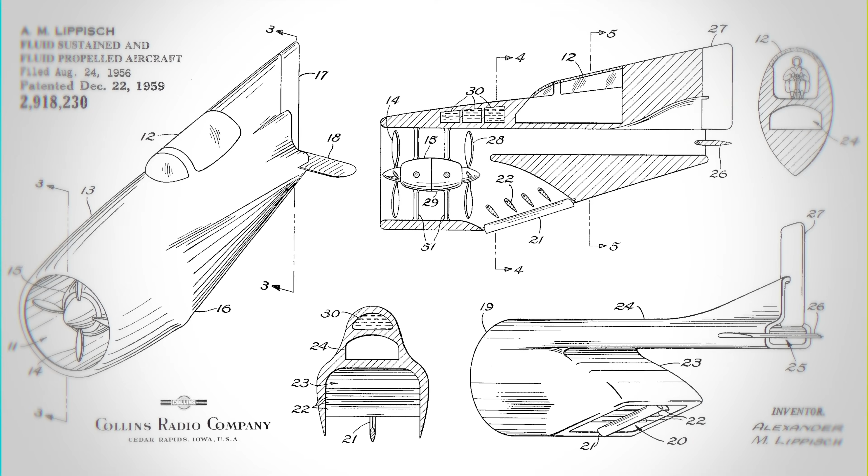These are the upscaled and colorized lessons of Alexander Lippisch. Lippisch was a pioneering German aeronautical engineer renowned for his significant contributions to aerodynamics, particularly his work on tailless aircraft and delta wing designs. His career spanned crucial decades of aviation development, marked by a persistent exploration of unconventional flight concepts.

Today, we want to talk about stability and control of an aircraft. You know, it is often said that if you have an engine with enough power, even you could fly a barn door. Now, I must doubt that. Well, I couldn't make the experiment with a barn door right in here because I fear the barn door is too big for this place.

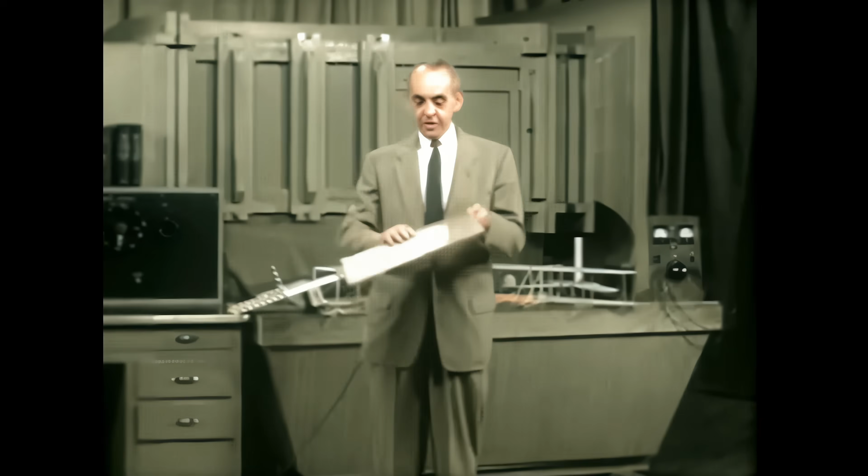But I could probably take this cardboard as a model of a barn door. And we can try to fly this barn door model. And you will see how it flies. Well, I think the barn door does not fly. Even if I give it a push, it makes only erratic motions and falls down, but it does not fly.

See, this is an important point. Something which moves through the air, we call it fly. And some other thing, we say it falls or it is thrown. What's the actual difference? When something flies, we expect to have a steady motion with almost uniform velocity, where this thing which flies keeps the same attitude all the time. Something which is thrown might change its attitude, it might change its course and do erratic motions.

Well, I can explain it in a very simple experiment to you. See, I have taken from my desk calendar two pieces of paper. The one piece of paper is just this one. You see, when we let it go, it makes these erratic motions in falling down, as you see with any piece of paper. Now, if you fold some part of this up so that you get a special position of the center of gravity and shape it a little bit different, then you can make it fly. You see here?

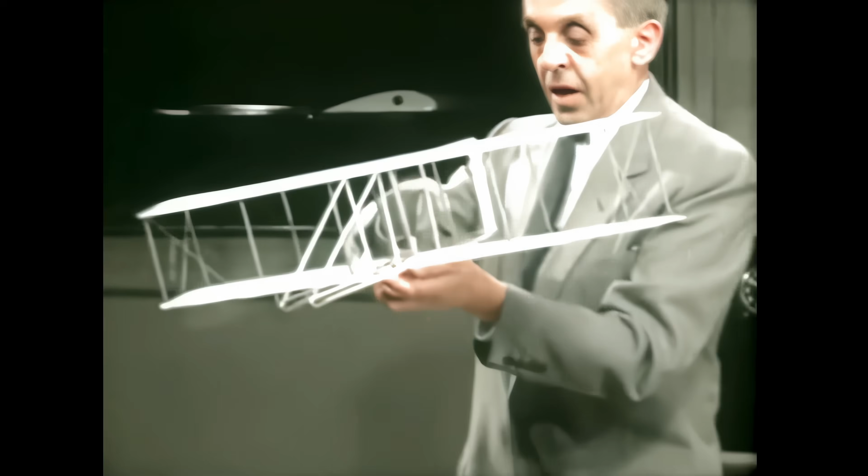Now I have here a very nice model of their 1902 glider, an exact model of how the glider looked. We have even built in the controls as they used them. The pilot lays down on this lower wing and has in his hand the elevator control, which is this one. You see it move?

So he pulls back and the thing goes up. Now he has a cradle where he lays in, and when he shifts this left or right, the whole wing warps. I hope you can see it. This warping is actually not very much of what you need there.

You see, when I warp it this way, this angle is smaller while this angle is larger. But they met one difficulty this way. The moment you warp it so that this angle is smaller and this one higher, the plane would roll over this way. Then, due to the higher lift which you have here, you have more drag, and this drag would actually try to turn the plane against the rolling.

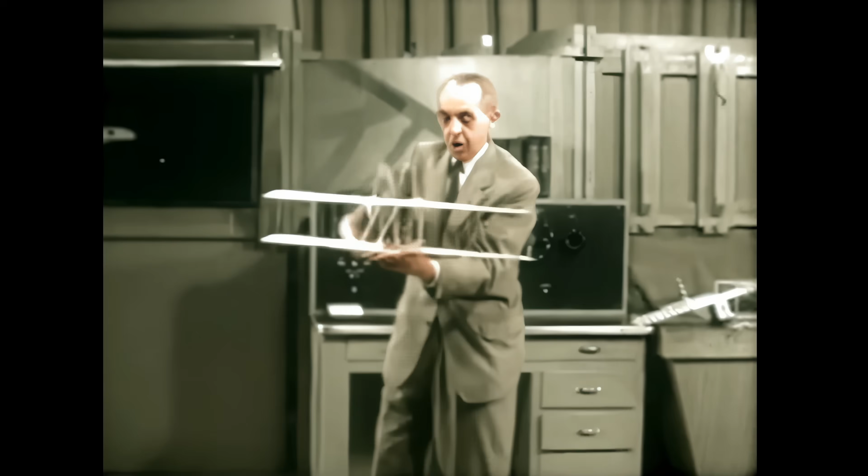Therefore, in addition to the wing warping, they used a rudder directly connected with the wing warping, so that when you push this wing down and have more lift but also more drag, the rudder would counterbalance this drag by turning the aircraft in this way. This very intelligent method of controlling an aircraft was actually the solution to the invention of the first flying machine.

Now, most people would think that such a control in front for pitch, meaning for longitudinal motions of the aircraft, would not be stable, that you'd have to control it all the time. Actually, that is not so. You can make an aircraft flying stable in pitch with an elevator, as we call it, in front or at the rear, and in both cases you can obtain stability of flight.

As I can show you here, I have a little tiny, flimsy model where I have the additional horizontal surface, the so-called elevator, in front. You will see that this flies very nice and stable.

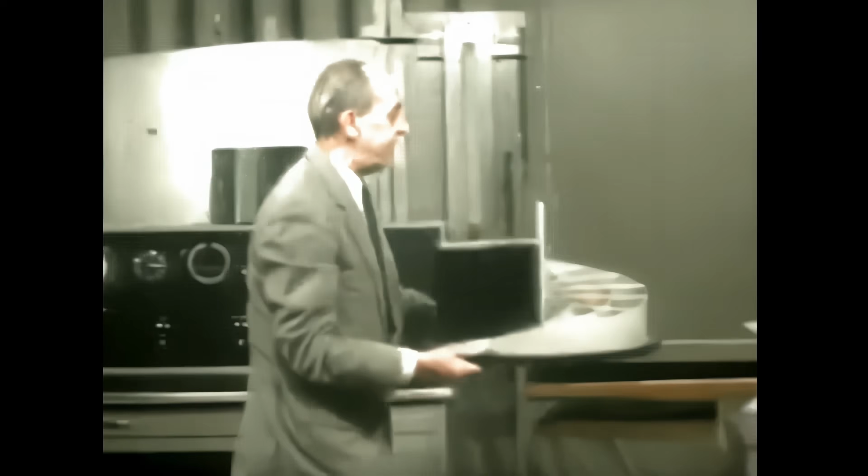Here you see a spiral surface like this, and you can imagine that each of these little sticks represents the position of a propeller blade while it goes once around. And we have to put the propeller on such a surface which is here steep and there gradually more flat.

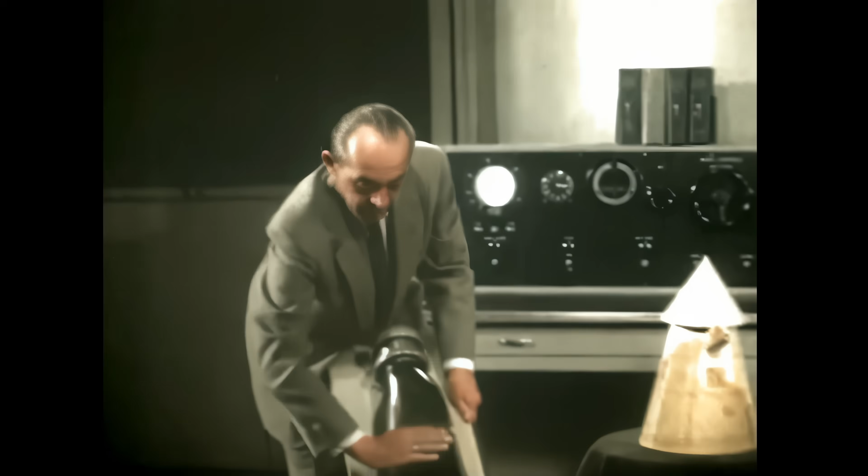We can see that also if we take a propeller model like this here. Look at it. You see that this is warped, and we have inside the steeper angles and outside the more flat angles. But if we take a piece out, we see that each section looks exactly like a wing, as we had our wings in the smoke tunnel.

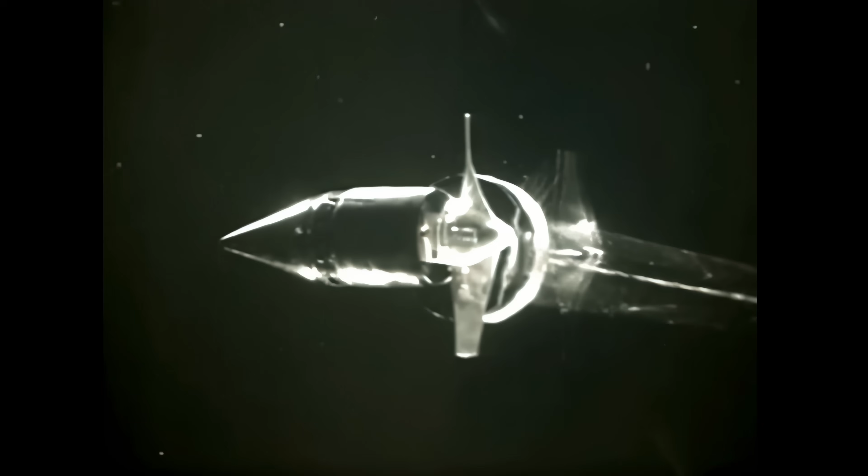Now, to observe the action of such a propeller, we have here a model in our smoke tunnel. This model is just a tiny propeller driven by a small electric motor. We have only 3 inches width in this smoke tunnel, so this propeller is quite small. You see it here mounted in the tunnel.

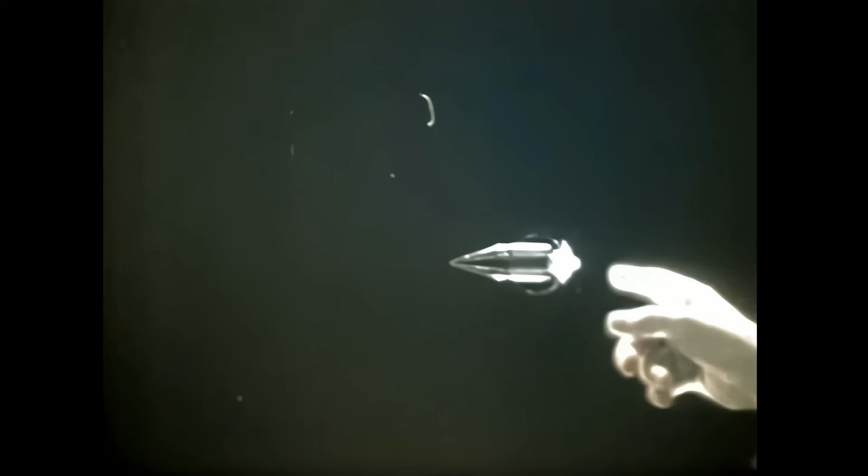And when we now turn the electric current on, you see it runs and draws the air through the tunnel. If we start now the tunnel itself and produce some smoke, then we see at once the flow picture around a propeller. Isn't it interesting? You see, in front, the air is sucked into the prop and is accelerated before it hits the propeller disc. And then behind it, it again is pushed out. So we have a pressure differential across the propeller which pushes the air backwards.

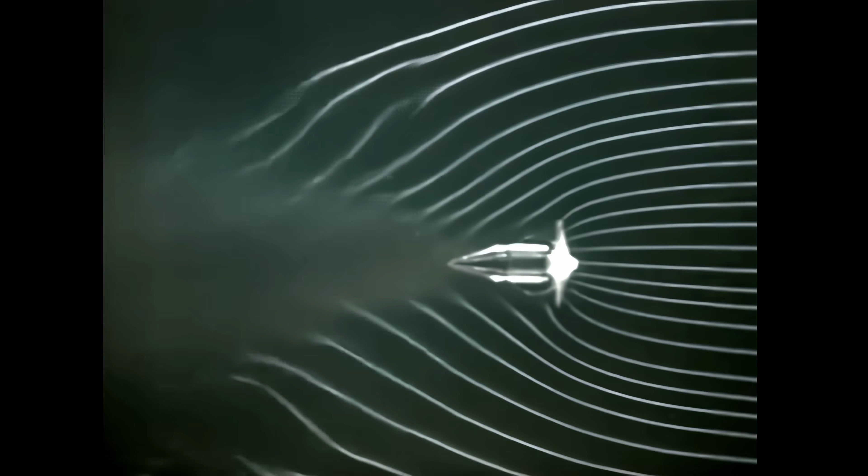You see it even probably better if we just cut the speed off and let the propeller itself make the flow through the tunnel. Now we can also turn this propeller and give it angle of attack, and then we have the action of a helicopter rotor, which is nothing but a propeller which is now inclined to make lift and propulsion. You see it here very well. We also can take a little less speed so that you see this action more distinctively. But the best we can see it if we look at slow motion pictures which we have now here.

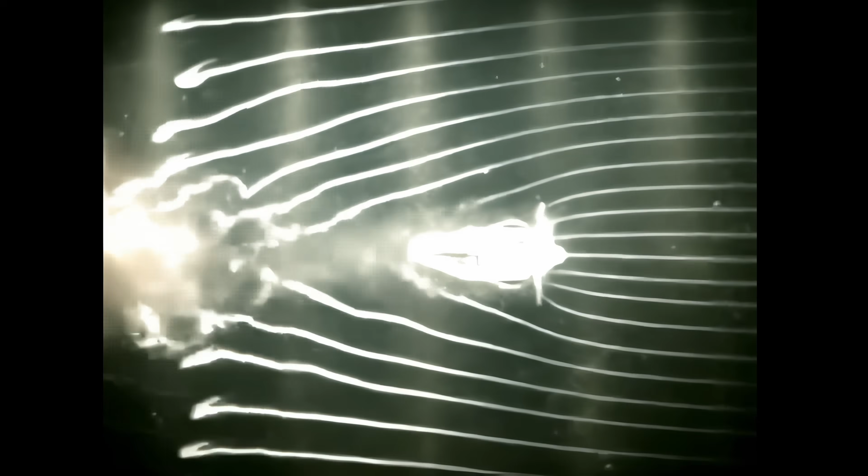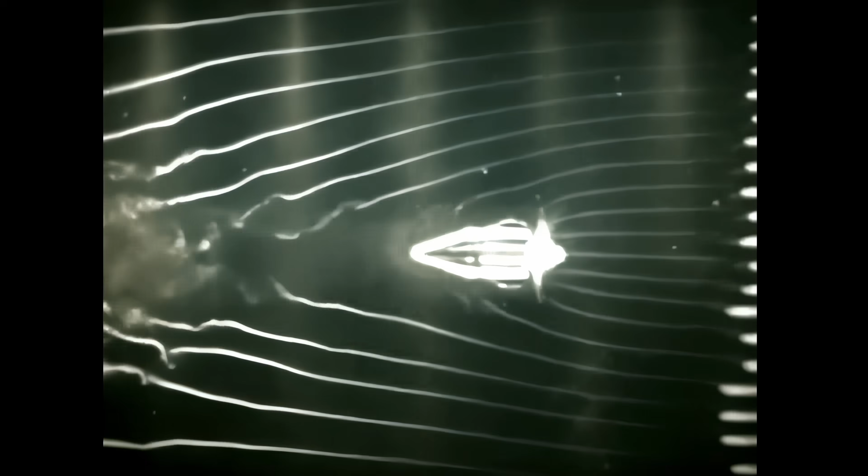There it is. There we see the propeller in the smoke tunnel, taken with high-speed pictures. We have also pulsated the flow so that you can see the velocity distribution across this propeller.

Now we have the same propeller in an inclined position, and we see now very clearly how we could make it lifting and propelling.

You see, the shift of this timeline is actually the same as we had with the high lift wings. That means we have lift here, and also thrust, since the propeller is inclined, so part of the lift is a horizontal component which pulls the thing forward. That is like a helicopter would fly.

We have seen the last time at these pictures in the smoke tunnel that we can use a propeller not only for a propulsion device but also as a lifting device, and we have even seen this in the slow motion pictures with the pulsating smoke, how the flow went over and gave lift and forward thrust.

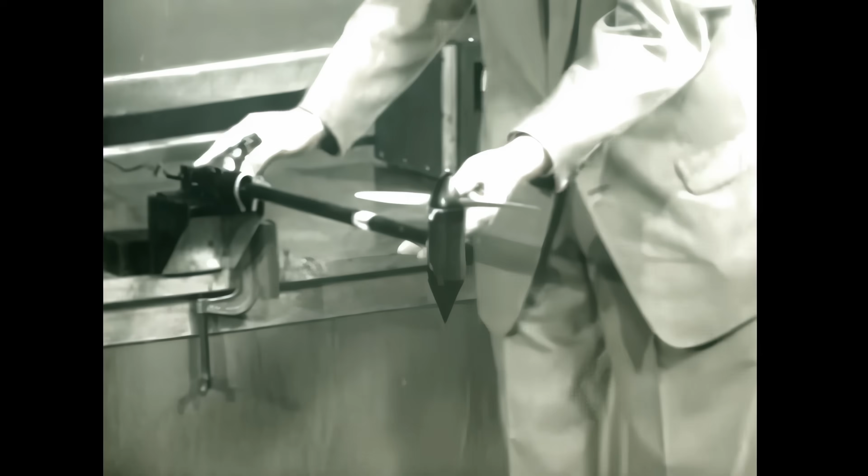Now here we want to make a little test to see how much such a propeller would lift. We have a little model propeller here driven by an electric motor, fastened to an arm which moves around. We have a weight which we can shift so that we can finally load the propeller so much that it just barely lifts this weight. Now let's turn this prop on.

You see, I have here a power supply, and we can see the voltage and the amperage which we put into this little motor. Now it has about 10 volts, 15, 20, 25. There we are. So it lifts at 28 volts.

You see it floats. Now you can shift that weight over there and give a little bit more power. Now let's shift the weight further on. And still lifts.

Now let's put the weight here. There we are. Have it so loaded, so much loaded, then it wouldn't lift itself anymore. So that's the limit with all the power on, as you see, 33 volts.

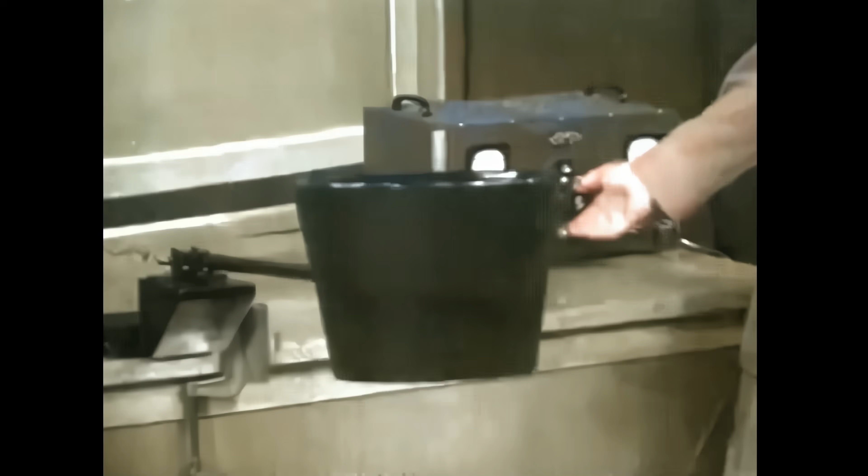That means we have increased the lift of the propeller considerably by putting just a shroud around, housing it. Actually, this lift increase in a larger scale is in the range of 60% more lift. Now, to explain it to you more particularly, especially the flow condition which we have around such a shroud, we can see again a shrouded propeller in the smoke tunnel.

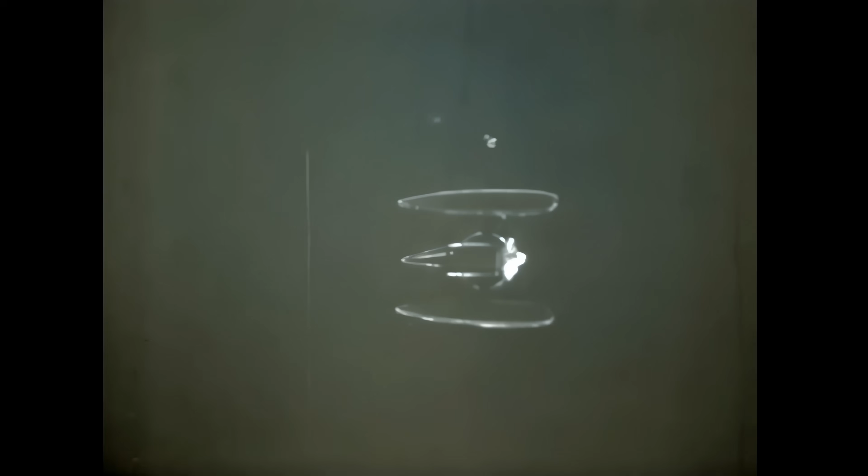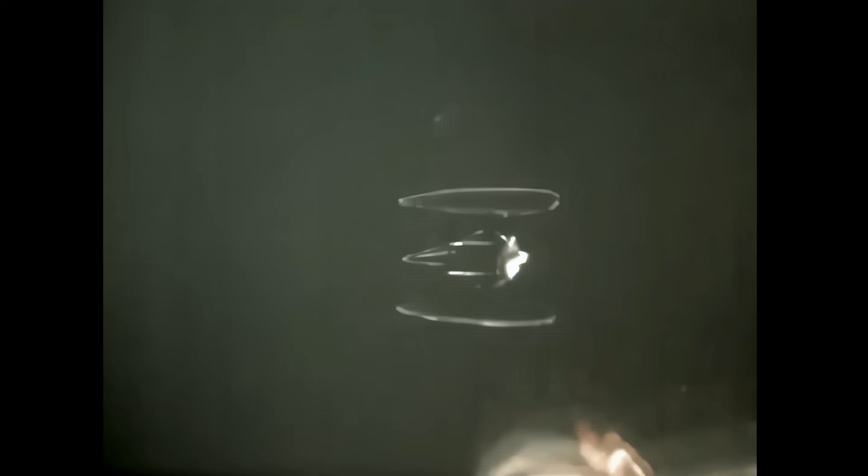So we have put a little shrouded propeller in our smoke tunnel. Actually, that is the propeller model which we had before, and on both sides we have put a wing-like section on it so that we have a channel through which the flow has to go. We couldn't make a round shroud, otherwise you wouldn't see the flow inside.

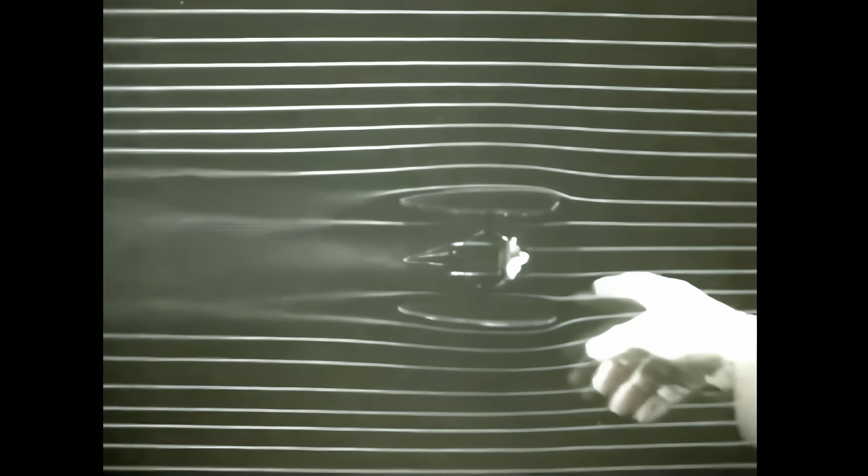Now let's start the tunnel and the smoke, and we might see how this propeller works. Here you see it first without the action of the propeller. You see that there is quite a bit of drag behind it because that wake shows there is turbulence which makes drag. Now if we start the little propeller, watch this.

As you see, a large part of the air is drawn into the thing and accelerated, and also the outer streamlines come near to the sections so that we have practically no drag due to turbulence over the shroud.

We can even see it better if I stop the smoke as it looks here, to see how strongly this pulls. And when I turn now the model, then we can see how it would work with an angle of attack, so as a propulsion and lifting device.

But all these actions you observe even better if we go back to our slow motion pictures. And there you have it. Here first, the action of the shrouded propeller as a straight propulsion device, giving only forward thrust. You see how the air going towards the shroud is propelled, because our timeline bends forward in the center.

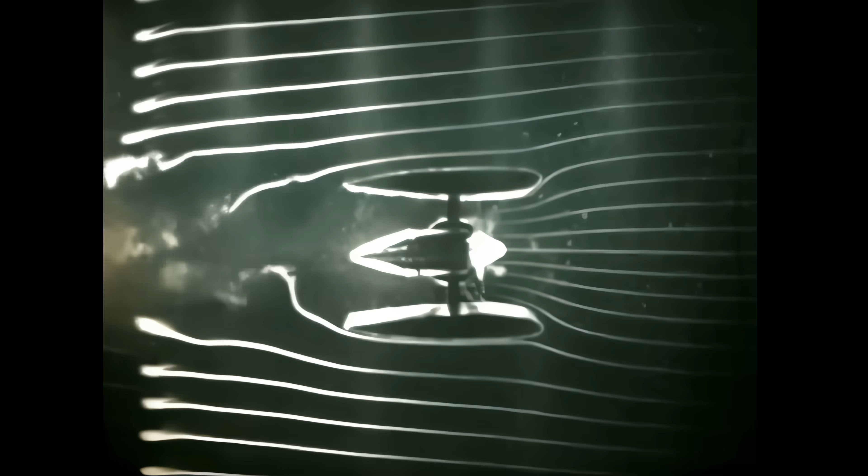Now if we have it inclined, you see at once the velocity field around such a device, and you see very clearly that we have lift, as we had lift on the wings, because of the shift of the timeline. You see on the other hand how the air which goes through the shroud itself is propelled and comes out much earlier - the little smoke cloud - than the other smoke from the timeline. We see therefore that such a device can be used as a lifting and propelling agent for an aircraft.

The shrouded propeller is the simplest example of what we call an internal flow system. That means a flow which is now completely enclosed. And since we have it enclosed, we can guide it as we want. As we have seen, first of all, it is the most efficient lifting device. On the other hand, it is also highly efficient in forward motion.

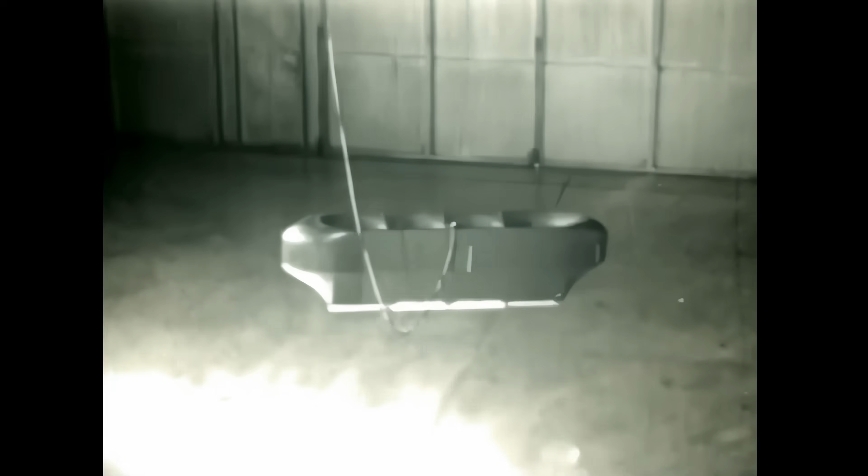Well, this brought me to an idea: to take the shrouded propeller as the design element for an aircraft which would fly without wings. And we call it the Aerodyne - that means a dynamic flying airship. Just look at this little picture here. I will explain it later more carefully, but to give you a glimpse, our Aerodyne model, consisting of a row of 4 shrouded propellers, flies through the hangar in a test flight. It's propelled by 4 electrical motors, as you have seen here in our little model.

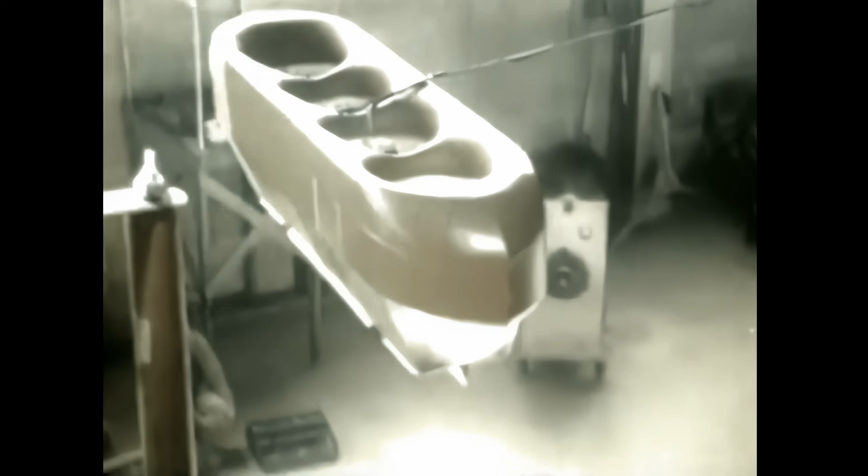We can use the propeller also for another purpose. We have seen that when we put the propeller in the tube, we have a larger pressure differential across the propeller. And if we make a very efficient propeller, then what is it? It is actually nothing but a compressor.

Now, the main thing is that the pressure differential is as large as possible. Therefore, instead of using just 2 blades as a usual propeller has, we can use several blades which cover most of the area of the propeller disc, as you see here. We have a tube with an electrical motor and a little multi-blade propeller, which we also call an axial blower or a one-stage axial compressor.

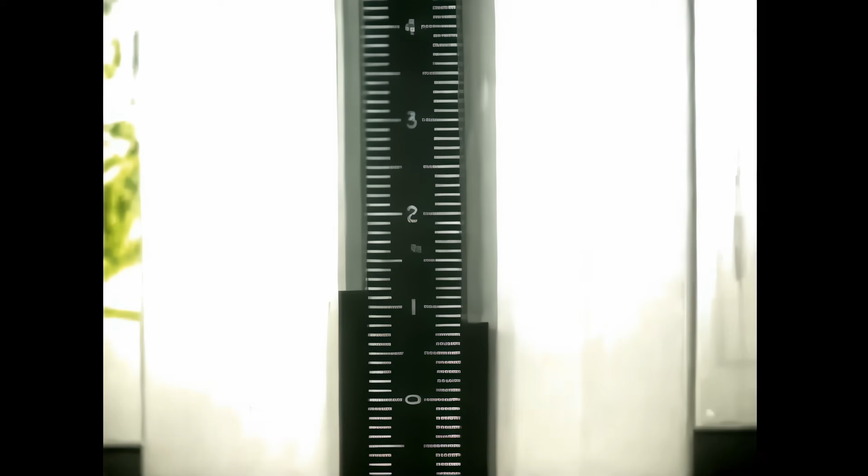You will see that with such a device, you can get a good pressure differential in one stage. I will show it to you here. See, we have our pressure gauge as we used before. And if I turn the power on, then we can read the pressure differential across the propeller. See it here? Now I turn the power on more and more.

And you see it gives a nice pressure differential of about 2 inches of water. Then if I close it down so that less air goes through, this differential gets even larger.

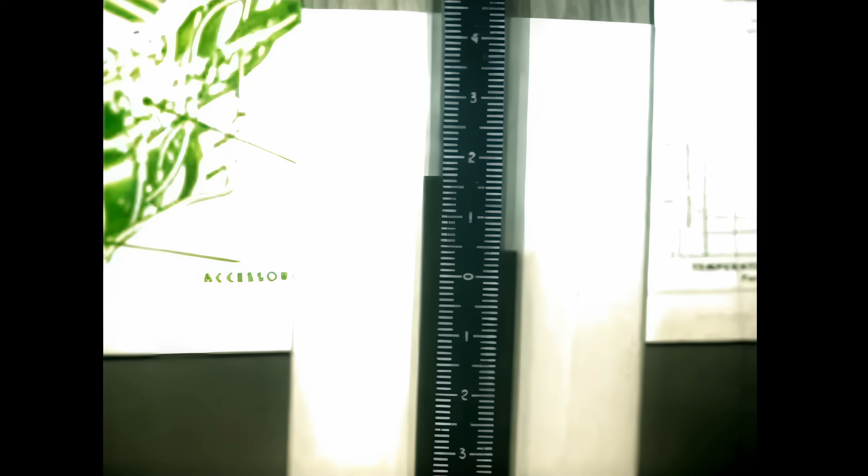Now what we do here with one stage in a simple little model, you can do in larger size, and you can put several of these compressor stages behind each other, and in this way create a large compression. And when you then take the air which you have compressed, heat it up and blow it through the turbine, and let the turbine run the compressor, then you have what we call a jet engine.

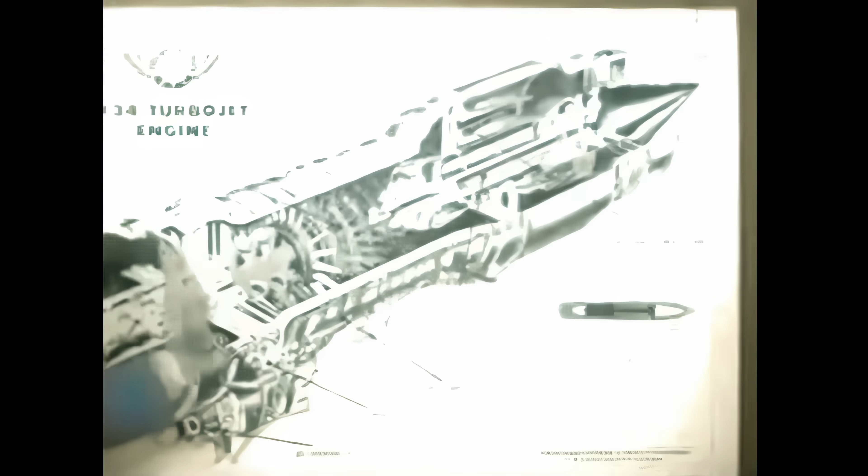A jet engine is actually nothing more than a multi-blade shrouded propeller, which is here called the axial compressor. This is this part of the jet engine. Now, due to these many stages, there are jet engines with up to 14 stages in this compressor.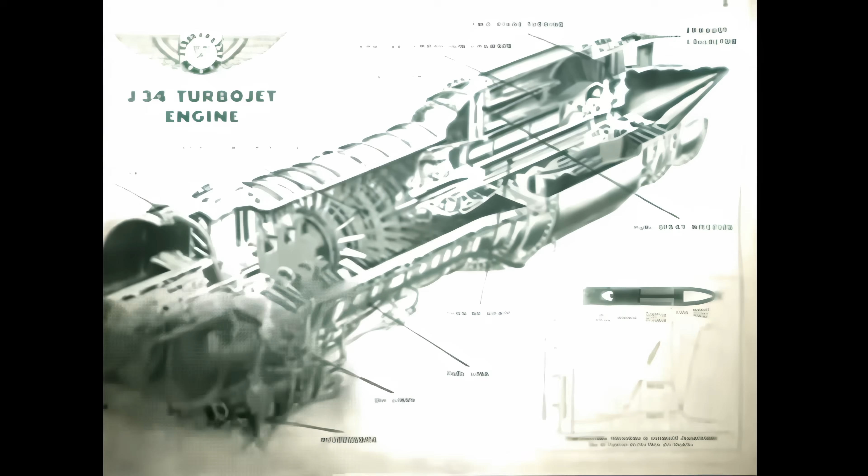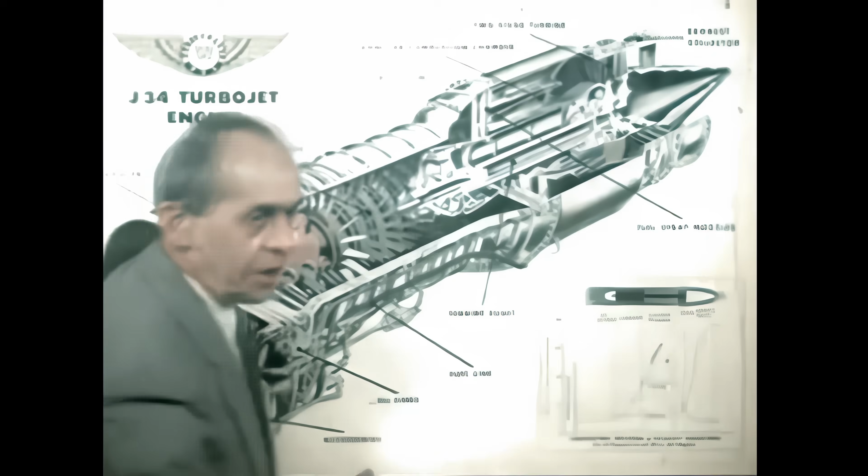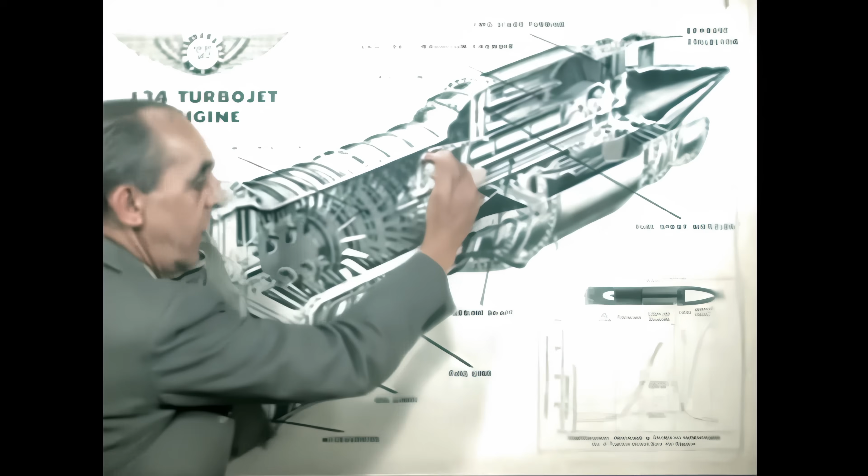You get a large pressure ratio from the inlet to the outlet of the compressor, where we now blow the compressed air into a combustion chamber, burn it, increase the volume, and then blow this hot gas against a turbine, which takes part of the power out of this heated flow and turns it back through the shaft into the compressor, so that you drive the compressor with this part of the power, and the other power goes out as the jet stream. The thrust is actually produced by the compressor part of the jet engine and partly by the inlet.

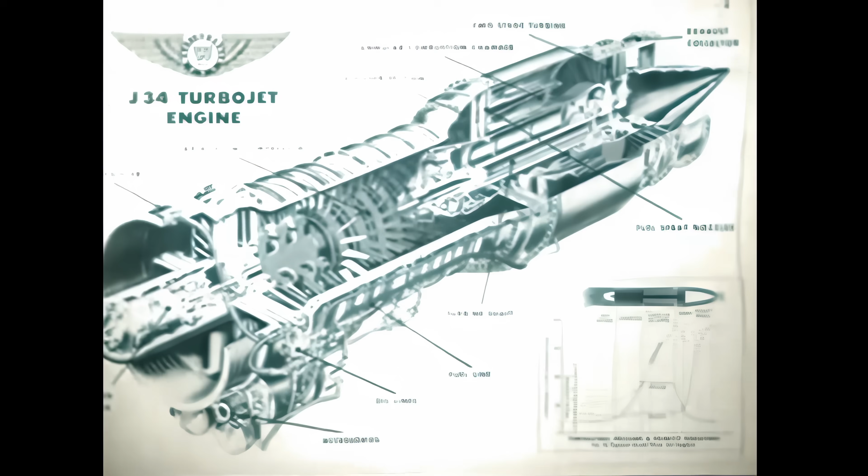I will not go too far into the explanation of this process, which is actually in many ways more thermodynamics than aerodynamics. I just want you to realize that a jet engine is actually also a propeller device, since it has these compressor stages which are nothing else than a multi-blade propeller.

Now, to show you such action in the smoke tunnel, we couldn't put such a device with these many blades in our tunnel, so we made this simpler. We made a small model of a jet engine, the cross-section of it, and instead of driving it with such a complicated device, we have a little jet stream in it.

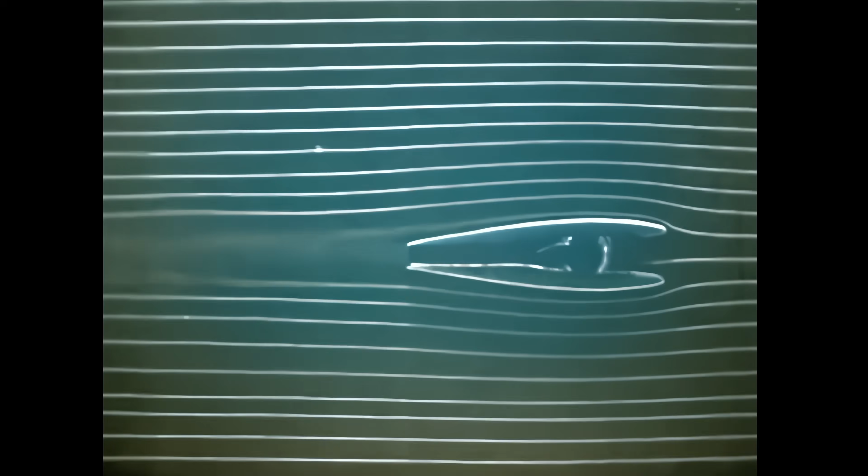Now here we have the model in the wind tunnel, and at the present time the blower is not yet on. Now let's turn on the blower, and you see at once that the propulsion which we have inside gives us a strong stream behind and also pulls all the outer air towards this body and smooths out the flow.

A very interesting effect. You see, when I turn the speed down, then even this effect gets stronger.

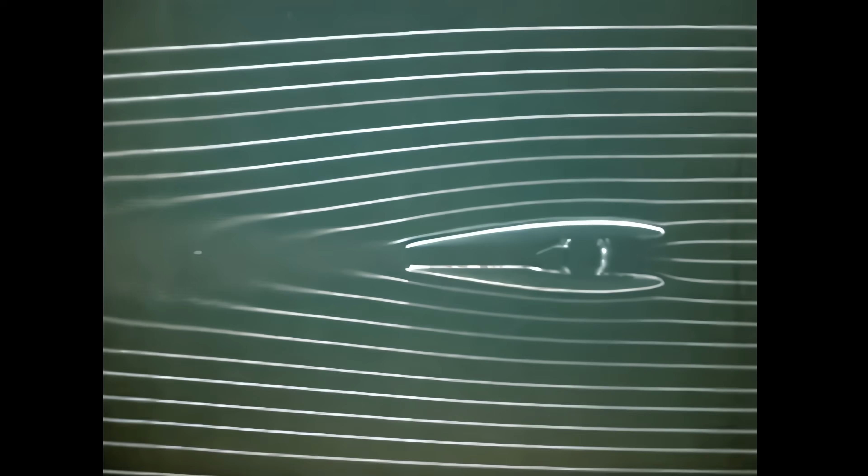Now we can also show it with angle of attack, and there you see it. But the better representation is when we look at the slow motion films of this device.

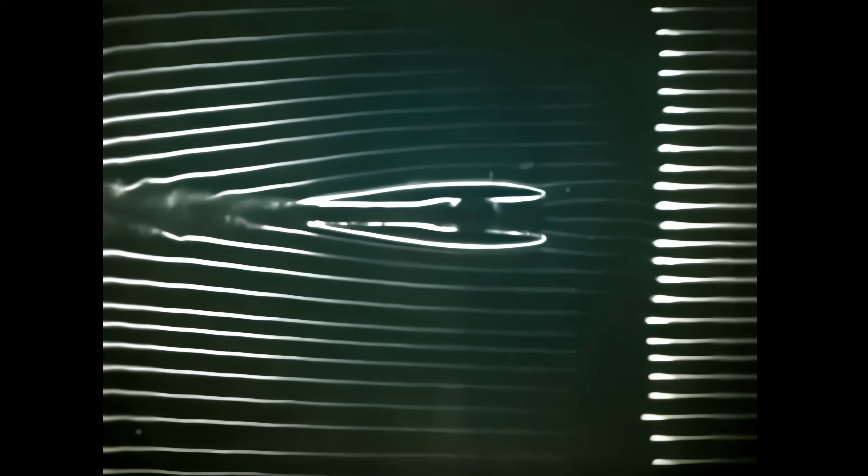Now we see the jet model in the tunnel in a straight attitude, that means with no angle of attack. We took this picture with the so-called pulsating smoke, and you see in this way very well the velocity.

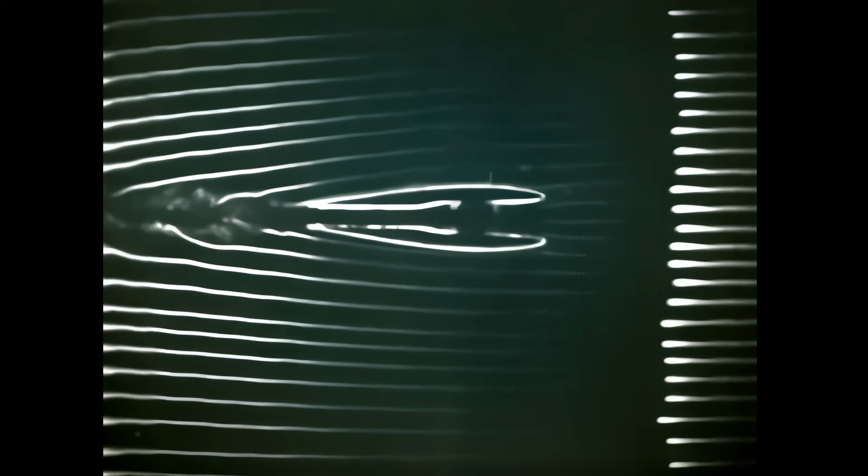First of all, you observe that the stream which goes in there comes out much faster due to the inner propulsion. You see back there this puff coming out. And on the other hand, you see how nicely the outer streamlines follow the outer shape of this jet. This is due to the fact that the jet stream back there stabilizes the flow.

Now you see it with angle of attack, and you can observe the same effect. It's very stable and smooth.

And on the other hand, you see now that we have lift, because we have this shift in the smoke front, the so-called timeline. That means we produce here not only the jet stream inside, but we also produce a lift due to the flow on the outer surfaces of such a propulsion system. That is also used to make what I told you once, this aerodyne.

The last of the propulsion systems which we want to mention here is the rocket engine, which will probably carry men into space. It can therefore not be an air-breathing system, but it must apply the oxygen and the fuel in two different lines which come into a combustion chamber and then get burned there and blow out a high-speed stream into the air. You see such a thing here in the smoke tunnel.

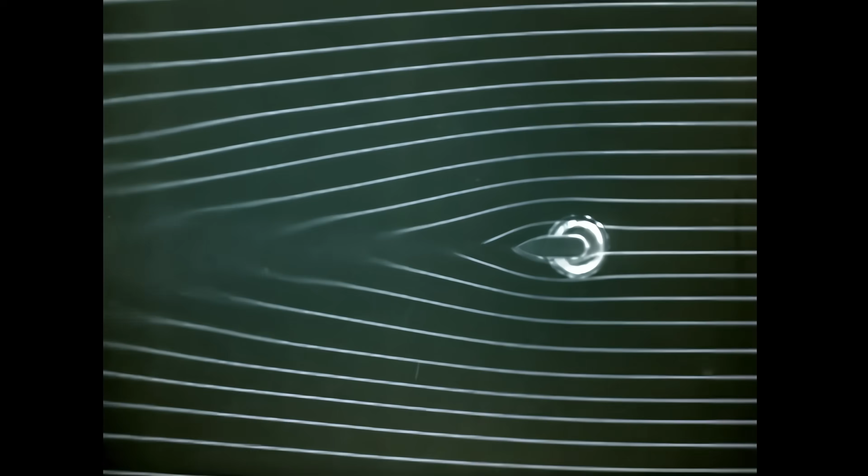In our next program, we will talk about the drag as it exists on bodies and wings. And to introduce this to you, we have here a body in the wind tunnel where you see what we saw before, the big disturbance which is caused by such a body.

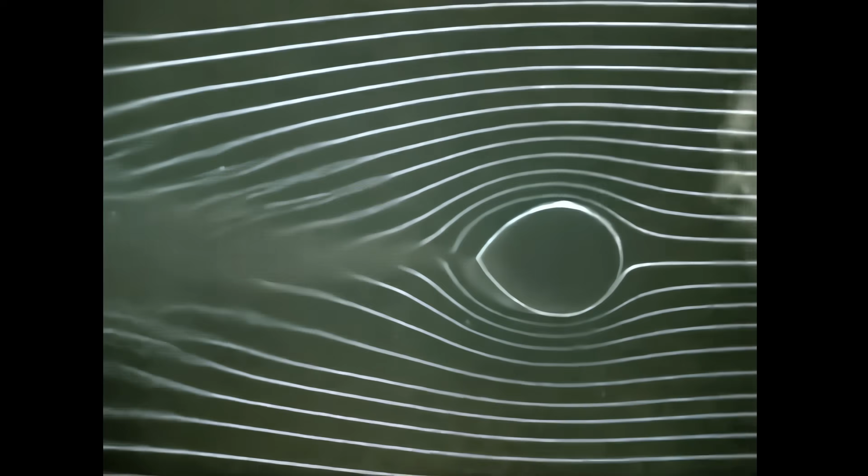But we have also done a trick. We have inserted here a little jet stream, and if we turn on the jet stream, you will see that we can reduce the drag. That means if we compose a body with the right propulsion system, we have an advantage of such a combination as you see it here. And this we will explain at the next program.